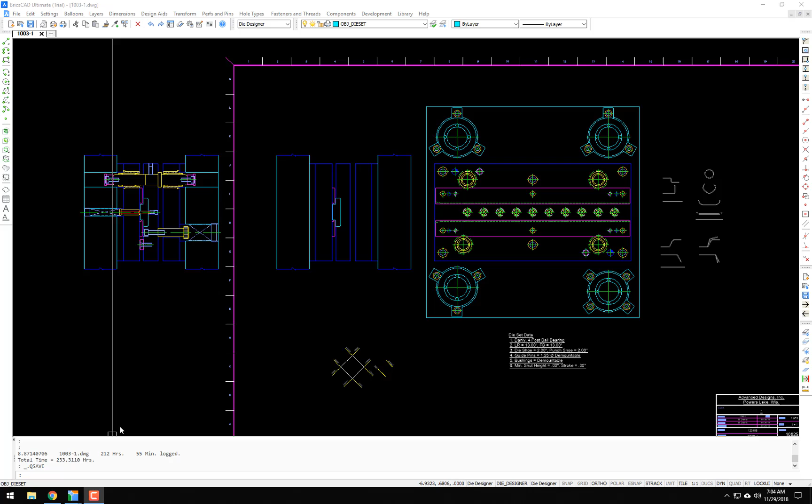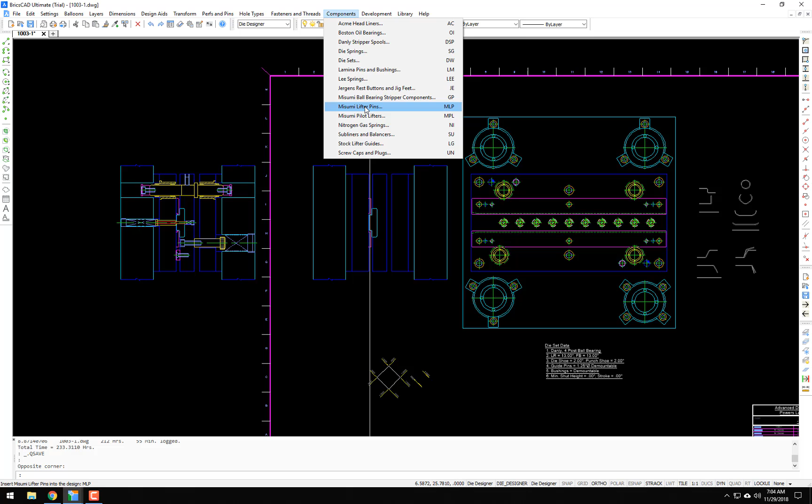For this video we are going to look at the Misumi lifter pins, or MLP. If you watched the previous video, it was the Misumi pilot lifters, and today's will be the lifter pins. Very similar in the dialog box, just one's a lifter, one has a pilot hole in it. So, just to run you through this real quick, MLP brings up the lifter pin dialog box.

We have our different diameters, and everything's in metric with the Misumi components. So I do have the decimal inch equivalent in parentheses for the diameter, and same for the pin length. We got our 28 millimeter pin length. There's the decimal equivalent, and as you adjust the slider, that updates in real time.

We have a few options for the placement: plan view, where you're just lifting stock material; hidden plan view, where the top of the lifter pin's underneath something like a pressure pad, and these are being used as a transfer pin rather than a lifter pin; and then our profile view. I will start with the profile view.

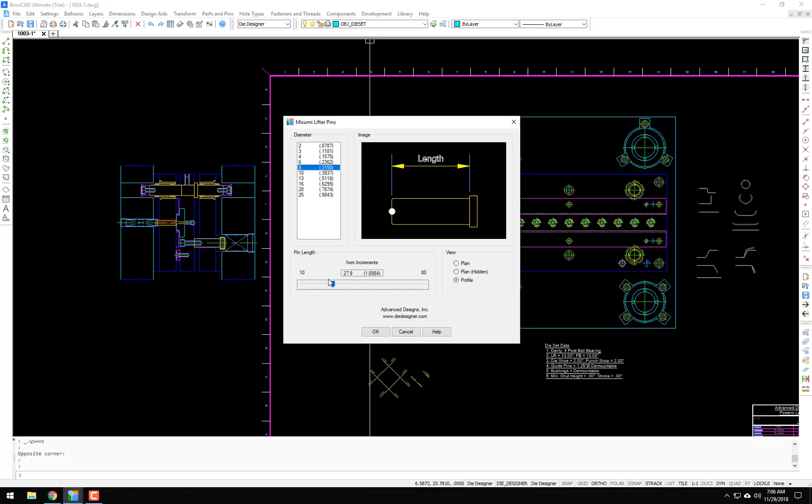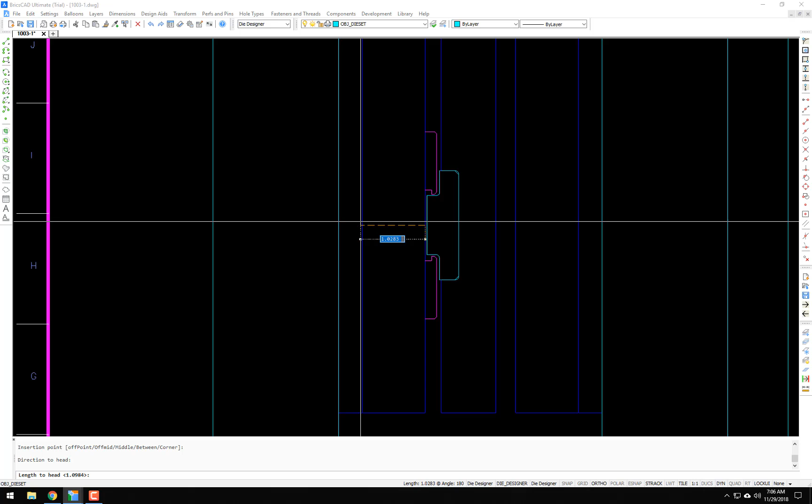Let's make it an 8 millimeter diameter, and I know my die yoke is 1 inch thick. So let's change the length to 1.0984. So I'll click OK. I am going to snap to the middle of this die yoke, the direction to the head, and then the length down in the command line. It's prompting me with what I had entered in the dialog box, so I'll accept that. And it draws it in.

So, little cleanup, and there it is. If I wanted to put a spring and a cap screw of some type beneath it, I got 3937. Let's see, unified. Let's use the 1/2 inch profile. Okay, we got the unified. Let's put a spring in here, SG. Let's put a 3/8 die spring of Danly blue in the profile.

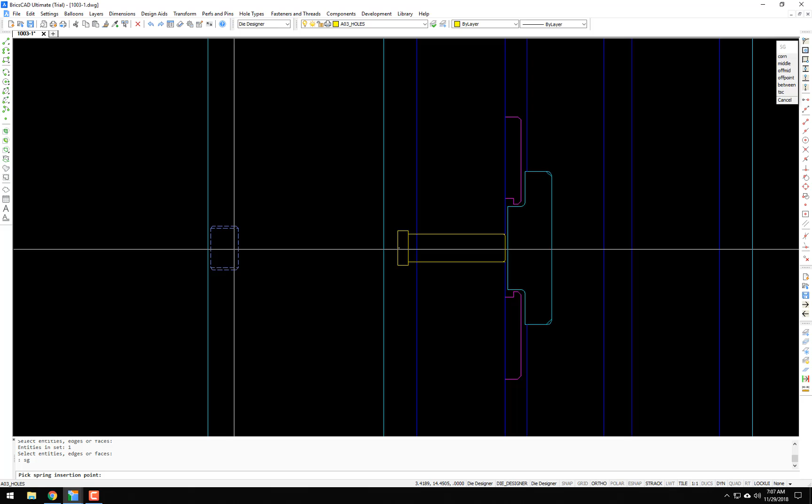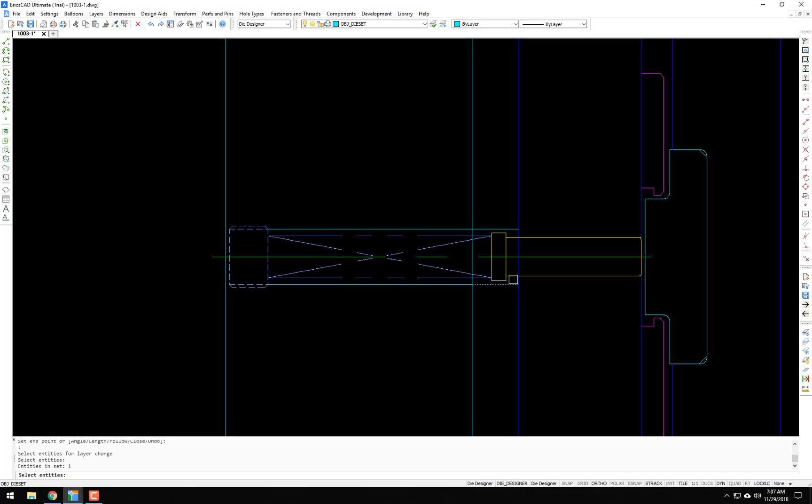Little cleanup. Little cleanup. So there it is. Now to put that lifter pin in the plan view, MLP. Let's go to plan view.

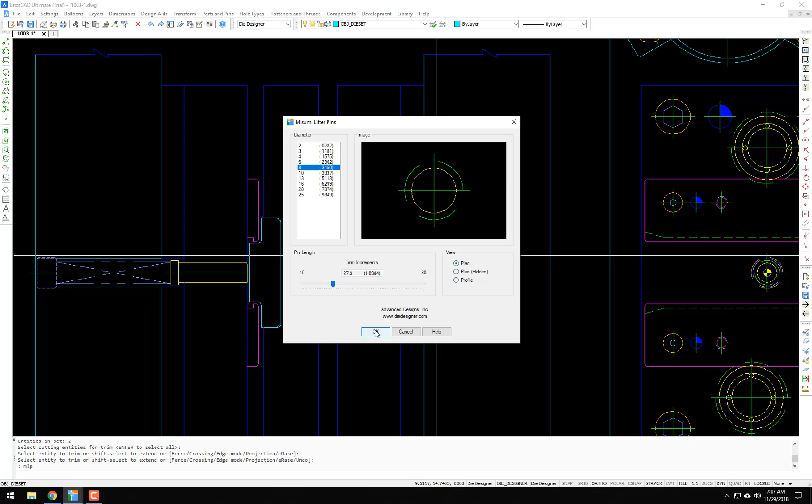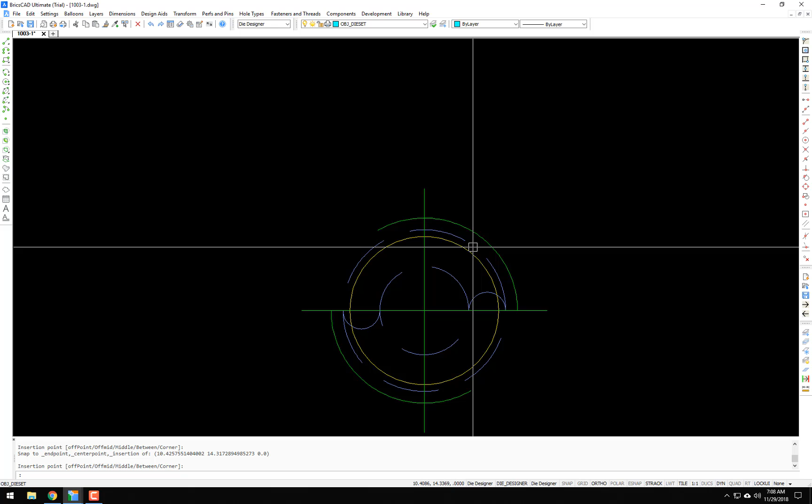Let's put that spring. Let me check the length on that spring. 1.8, 100, some preload. Okay. SG. Plan, 2 inches. And let's put that unified in the plan view. 1/20.

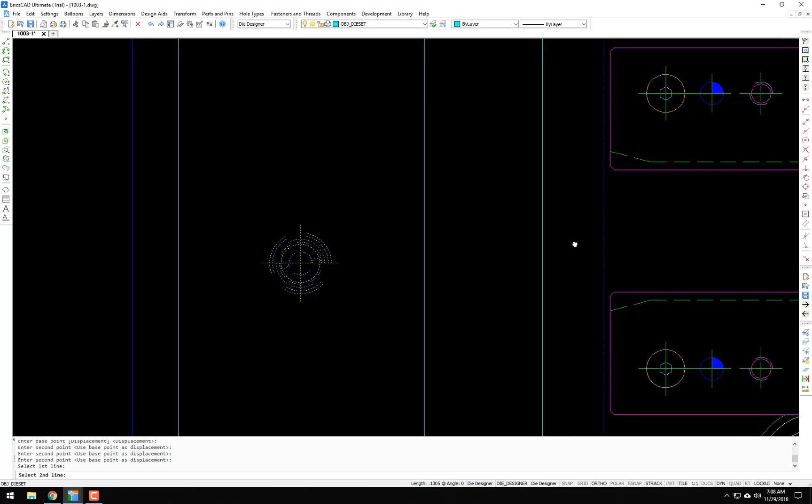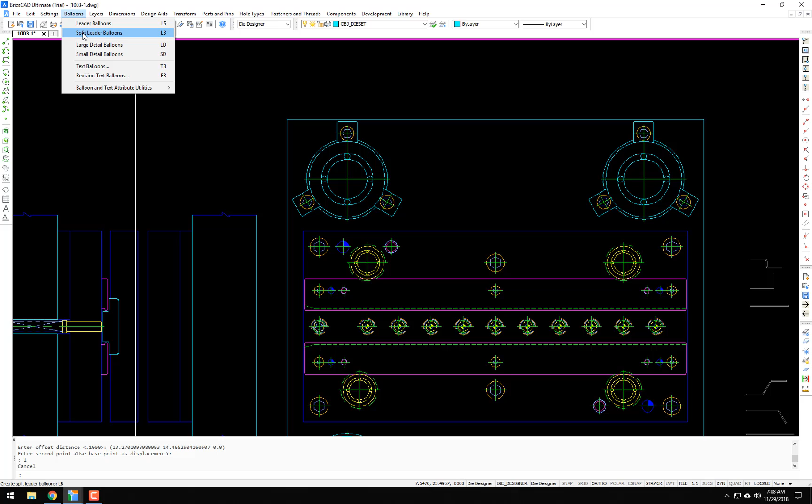Okay, so let's move this into a lifter position, and we will go off the middle of the die yoke. Oops. Off middle, and let's put it in line with those low heads. So there you go. If I were to balloon it, leader balloon, split leader balloon, we'll start with balloon 1. And I am going to link it. Let's just leave it at that.

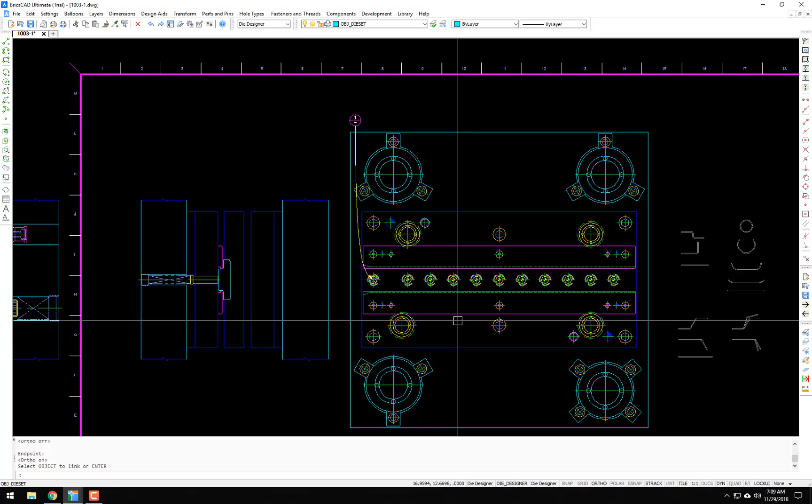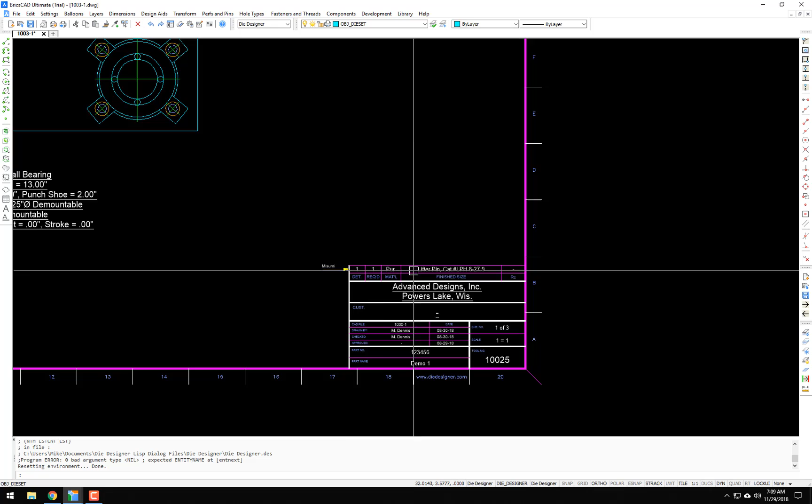If I erase this, and if I copied this, now there's 5 of them. And now I went back and did my bill of materials. Now 5 required, detail 1. So, kind of cool.

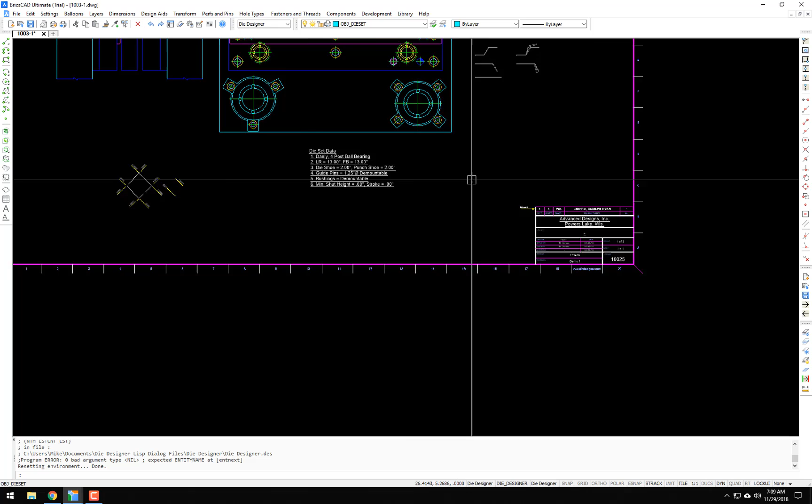Let me show you what it transforms into. MLP. Well, actually, I'll show you through the help system. If you click the help button, it gives you our description of the command, which is usually quicker than going up to the menu of MLP. The menu location, the different intelligence, you have the touch command, object transform, and I just showed you the bill of materials.

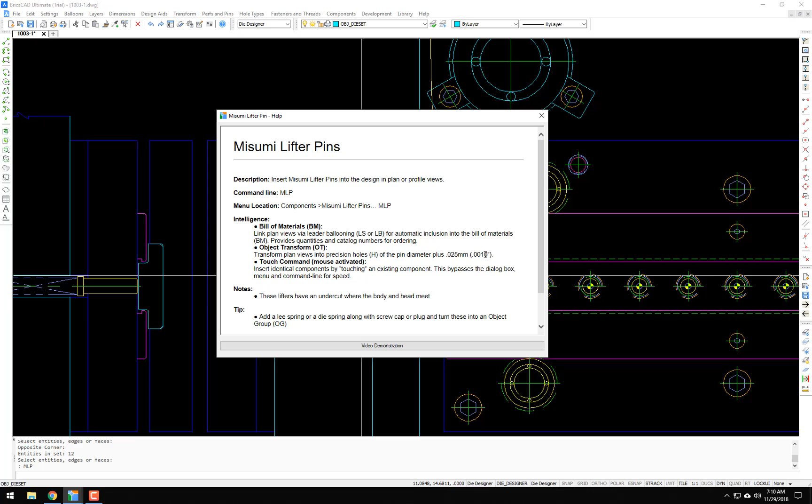Notes. Quick note, these lifters have an undercut where the body meets the head. I kind of like that because you don't have that radius you have to clear for on whatever hole it goes through. And on the object transform, which is what I'm going to do now, the plan views transform into a precision hole of the pin diameter plus 0.025 millimeters, or 1 thousandth.

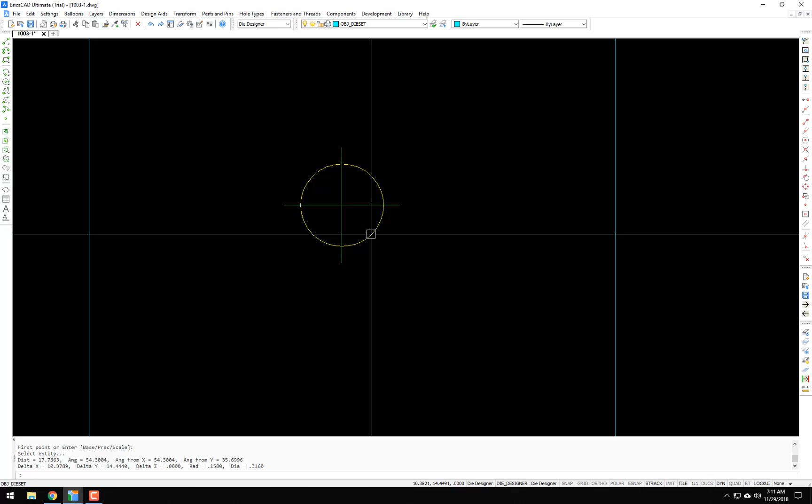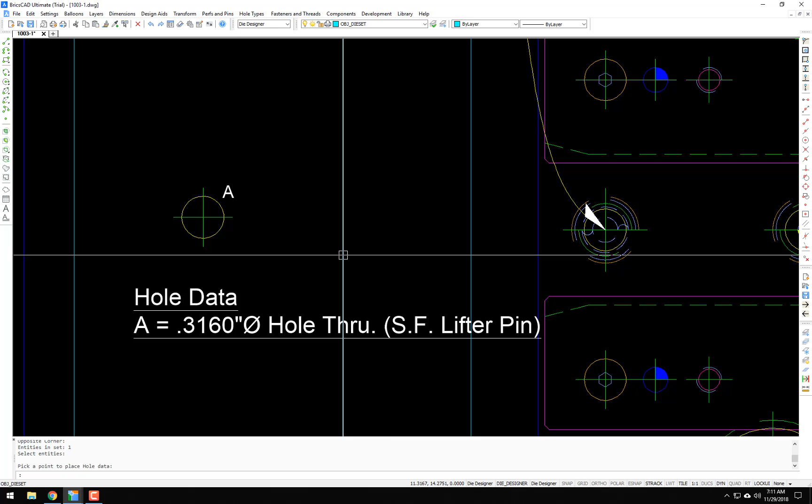So let's put one of these in. And the diameter of the pin is 315. Let's do object transform. And you'll see the diameter is 316 now. So if I did HD, well, let me show you from the menu system. Hole table or HD, the select option. And you can see it's a 0.316 inch diameter hole through, slip fit for the lifter pin. So, kind of cool.